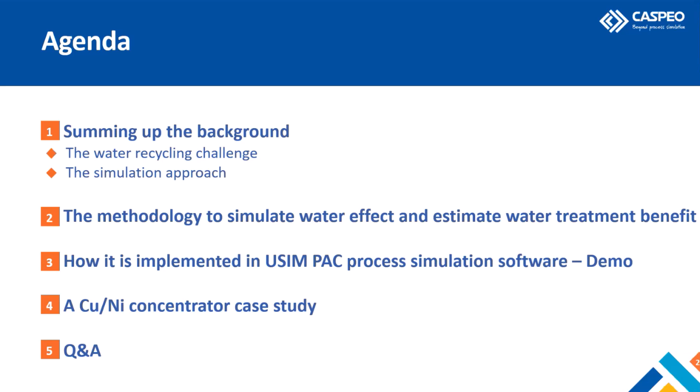Most of the work presented in this webinar was made in the European Union project ITERAMS. It had several targets: tailings valorization, minimization of environmental footprint, and more efficient water recycling in mineral processing plants. This is the task that Caspeo was involved in, more precisely in process simulation.

So to give a big picture about water management and the necessity of the company to have good water stewardship to maintain or earn a social license to operate, there is a need. What I want to illustrate here is there is a need to make water reporting.

This can be made at several levels. At the smaller level, at mine level, after the Brumadinho tailing dam failure, we had the global industry standard on tailings management that was released, and it embeds the requirement for water accounting on tailing dams.

At the company level, we have several frameworks, the water accounting framework and the water reporting, that give the framework for every site and the possibility for the company to gather all this data in the same report. In this way, the company can communicate on the way it manages water.

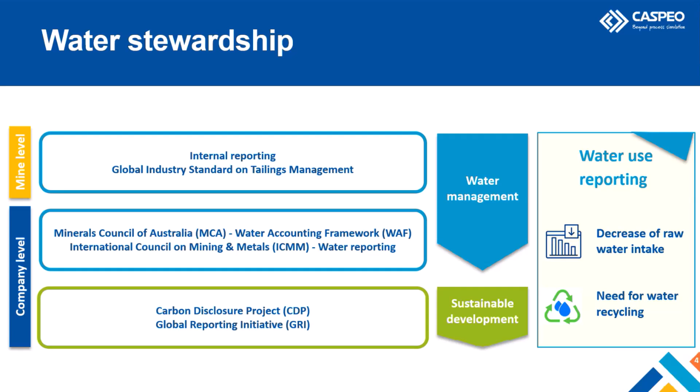There's a global need for water reporting, which leads to the need to decrease raw water intake and consequently to recycle more water in the plants. This increased need for water recycling also arises from a processing point of view, since water serves both as transportation media and reaction media. With the decrease of ore body head grades, we have a larger amount of ore to treat, and so more water needed to treat the minerals. There's a general trend to increase water recycling, which leads to more charged, recirculated process water. Two questions arise: what is the impact on process performance, and how do we manage this impact?

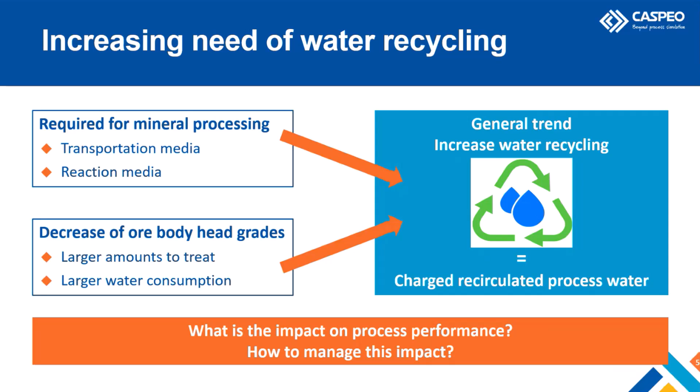Here is a simple flow sheet to illustrate the configurations we can encounter, and it illustrates our case study: grinding, copper and sequential nickel flotation, and tailing ponds at the end. The slurry goes to the tailing ponds, settles, and with this natural settlement we are able to recover some water and recirculate it through the different stages of the plant. But we still need an input of fresh water.

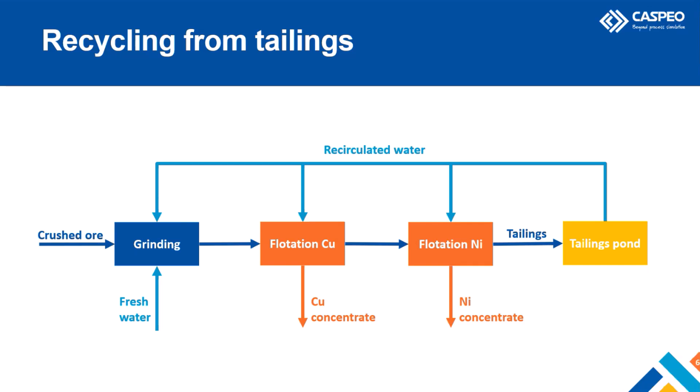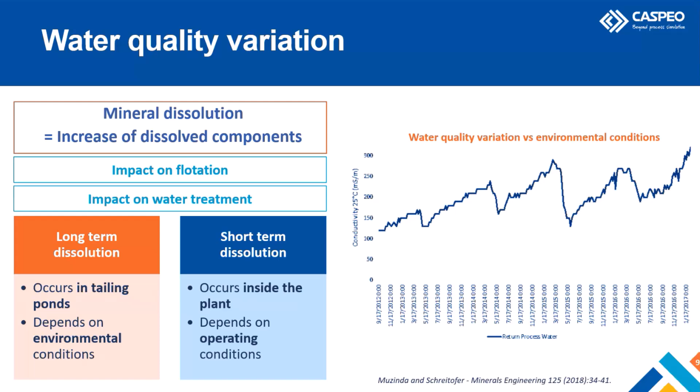We also see seasonal variations. During winter there's an ice cap, and snow accumulates in this cap. At spring, when it melts, this meltwater dilutes the process water, which accounts for the decrease in conductivity. So depending on the month of the year, we won't have the same water quality, and it will impact the performance of the plant. The other dissolution behavior is short-term, occurring inside the plant in the unit operations, and it's more dependent on operating conditions. This is the kind of dissolution we will tackle in this presentation.

To tackle this issue of simulating water impact on performance, we will illustrate this using the steady-state simulator USIM PAC, which embeds a library of state-of-the-art mineral processing models. What's important here is a specific approach of this software: it enables very configurable characterization of material, and it's very suitable when we use complex mixtures, as is the case here with slurries, which are difficult to describe as pure substances.

Another important feature of the software is a new feature we call configurable parameter law, which enables us to easily integrate empirical results from lab tests or pilot tests into the simulation. This semi-empirical approach is important for tackling the issue of water impact simulation. The advantages of simulation are that it avoids costly trials and enables us to easily assess new configurations of the plant.

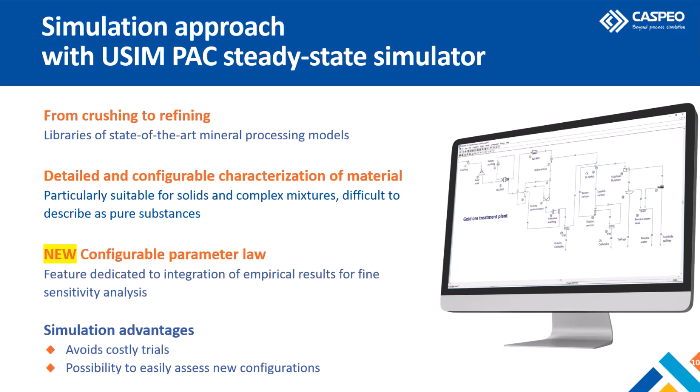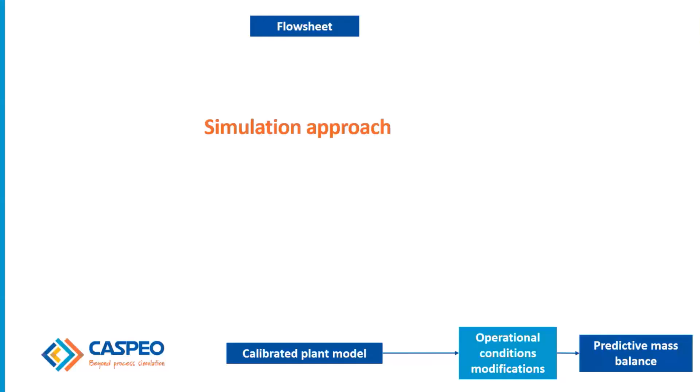So I will now describe the global approach. We begin with our configuration of the plant or flow sheet, and what we want is to have predictive mass balance, depending on the operational conditions. For that, we need a calibrated plant model. For this calibrated plant model, we need the plant data, the size of the equipment, a data set to calibrate the model, and the structured plant model.

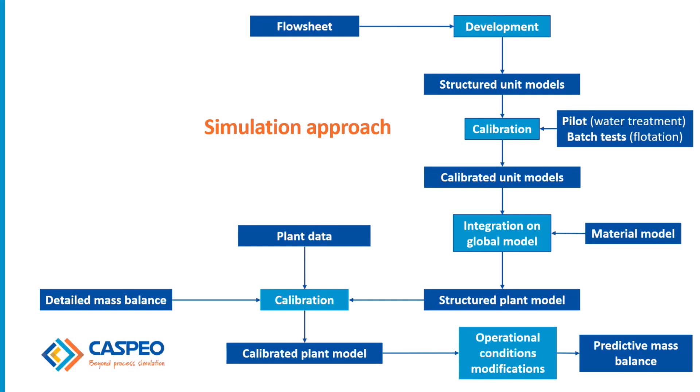To build this structured plant model, as discussed, we need a set of unit models that represent those used in the plant, which will be calibrated with pilot or lab tests, and integrated with the description of material in the structured plant model. We will also say a few words about obtaining the data set for calibration, which classically goes through sampling campaign, data reconciliation, and some assumptions on missing data. But now we will focus on building the structured plant model.

We will begin with the unit operation models. So unit operation models basically have several inputs: inputs regarding the material, so flow rates, composition, mineral or chemical, and also some parameters, for example flotation or dissolution kinetics, performance, and the size of the equipment. It gives as outputs the flow rates with mineral and chemical composition, but also other parameters such as energy consumption and capital costs.

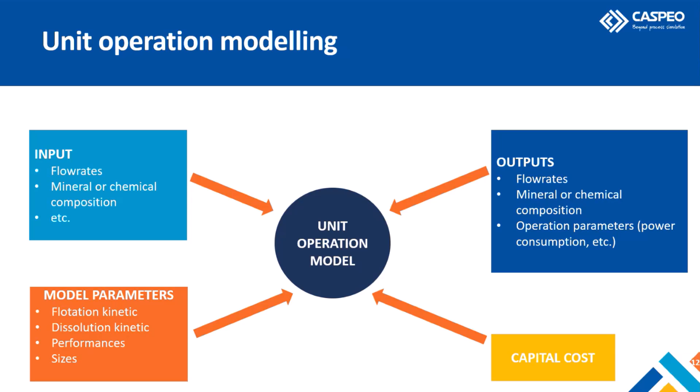In USIM PAC, we have several levels - a specific classification of unit operation models. We start with what we call level 0 models, which are pure performance models, just taking into account the results of lab tests, let's say a percentage of removal of a component, but no size parameter. Level 1 models integrate size parameters with simple parameters, but do not require complex experimentation, and we will focus on these two kinds of models. We also have a more complex model with higher accuracy, but which requires very specific tests.

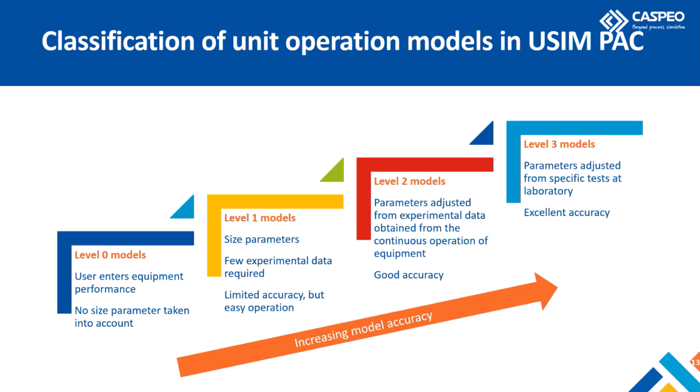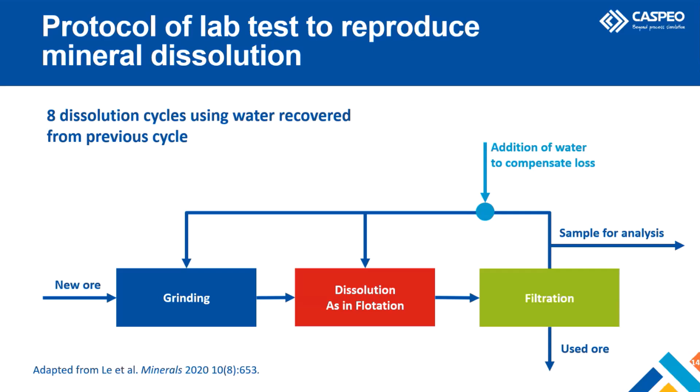I will now start with the first unit operation and the cause of the problem: the dissolution of mineral. Here in this simple flowsheet is represented an experiment made by our partner to simulate the behavior of mineral dissolution inside the plant. They took fresh ore, ground it, passed it through a flotation cell without reagent to simulate flotation but obtain the dissolution behavior, filtrated the slurry to recover some water for sampling, and to compensate this loss, took back some water from the start and recirculated this water through grinding and dissolution. This is a closed cycle, done in batch. After 8 dissolution cycles, they didn't see much difference in water composition.

To simulate this experiment, we used a first order kinetic model with 2 parameters: the kinetic constant and the maximal concentration that can be reached. Integrated in a continuous process, we use the corresponding equation but for a continuous process.

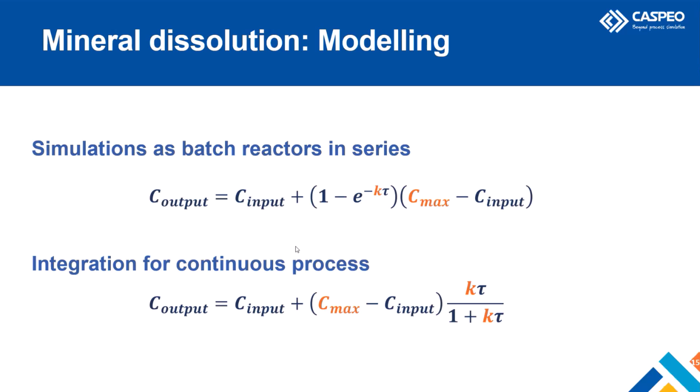In this graph are presented the results of the experiment and the model calibration. The results of the experiment are shown as dots for the first, third, sixth, and eighth cycle. We see that we reached a limit. But when we calibrated our model, we saw that in fact we could have gone further in concentration - we expected to reach a higher concentration. We explained that this is due to the way the experiment is done: we have to re-add some water at each end of the cycle to compensate the loss, so we have some dilution each time. In fact, this dilution is compensated by the dissolution of minerals that occurs during the batch cycle, but we can't go further - so this is a kind of pseudo-equilibrium.

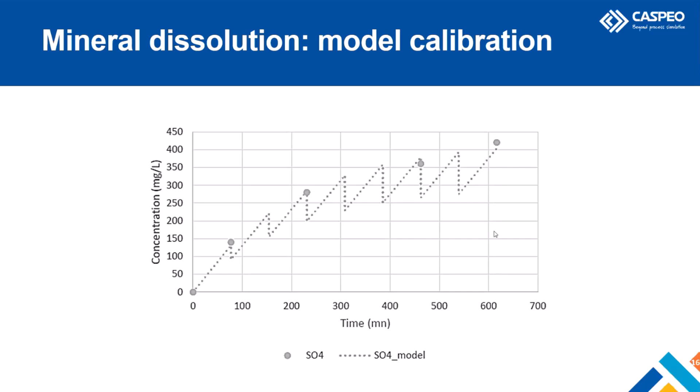So this dissolution model will be, as presented previously, associated to the unit operations where dissolution of mineral can occur. We have 3 flotation stages: rougher, scavenger, and cleaner. We didn't assume dissolution in the cleaner stage because there is a different operating condition there, with an increase of pH to depress nickel. So the conditions are not the same as in the flotation test of the plant, on which the mineral dissolution test was based. These are not the same conditions, so we assume dissolution did not occur in the cleaner. This assumption is reinforced by the fact that most of the slurry stream goes through the rougher and scavenger, and there's not so much slurry going through the cleaner.

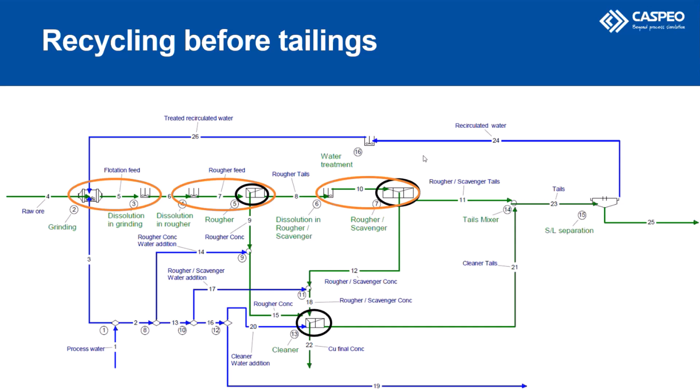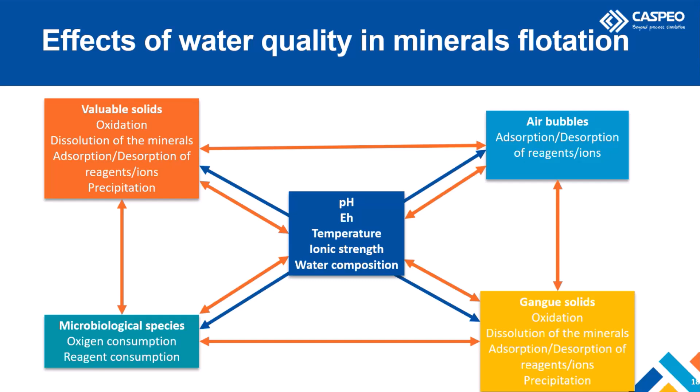We can have mechanisms linked to the solids, both valuable and gangue, such as oxidation, dissolution of mineral, adsorption of reagents, interactions with air bubbles, and with microbiological species also. This is very complex, so the approach we took was a semi-empirical approach, embedding these mechanisms in a simpler model. We use the first order kinetic model, as we will see.

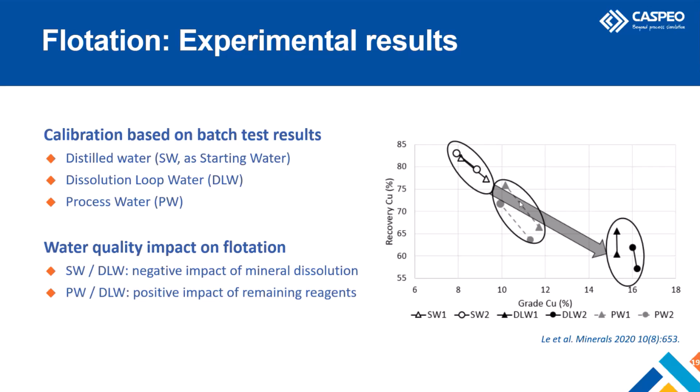Taking into account the concentration of the components that were assumed to have an impact, so sulfate, magnesium and calcium for negative impact, and collector for positive impact, we define the variation of kinetic constant depending on the concentrations of these components.

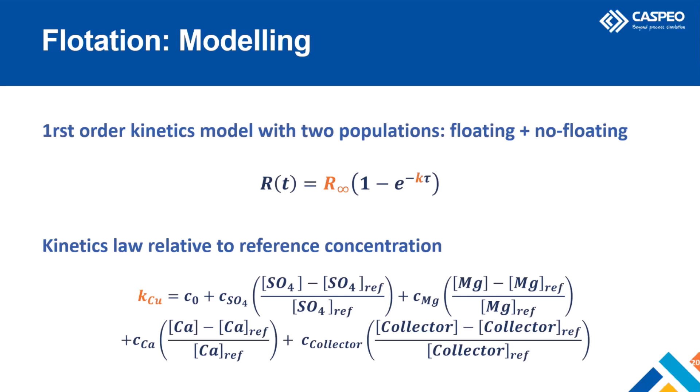So we've got our cause, the mineral dissolution, we've got the impact on flotation, and now we'll go through the last unit operation we need to mitigate the impact of mineral dissolution, so water treatment units.

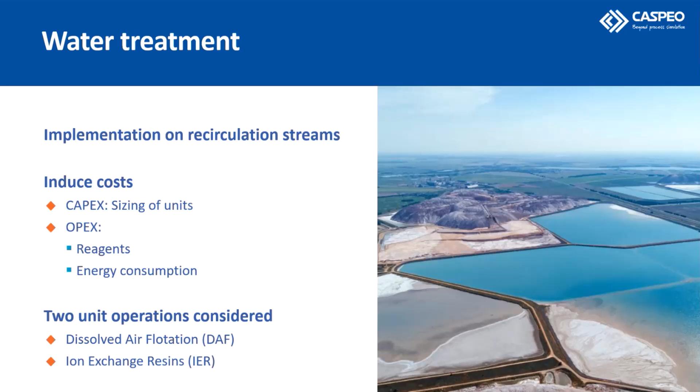They will be implemented on recirculation streams. They will induce cost, with capex and sizing of units, and also opex, with reagent and energy consumption. We will see two unit operations here: dissolved air flotation and ion exchange resins.

Dissolved air flotation mostly targets fines and dissolved components. It has a pretreatment with coagulation flocculation, and after this pretreatment, pressurized air is released to produce microbubbles that aggregate with flocs, make them float, and they can be removed. So the model is quite simple.

We use USIM PAC. We've got a fixed performance and key parameters, so air concentration and length-width ratio. With that, we are able to calculate outputs, the main characteristics of the process, energy, and reagent consumption.

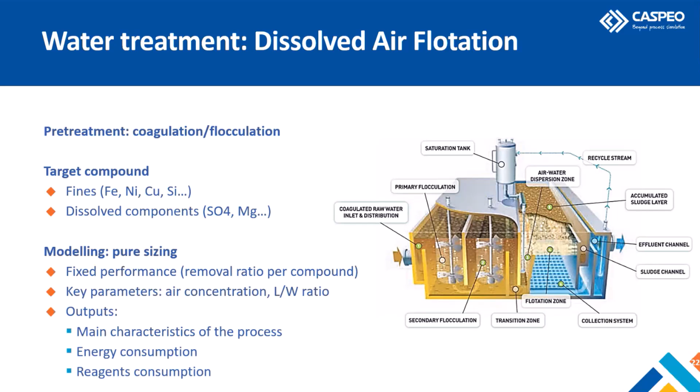The second unit operation is ion exchange resin. The targeted compound here is sulfates, removed by adsorption on resins, and this is a semi-continuous process with adsorption cycles and regeneration cycles.

Modeling this time is made with the Thomas model, with two parameters: adsorption kinetic constant and resin capacity. This calibration is obtained with the breakthrough curve.

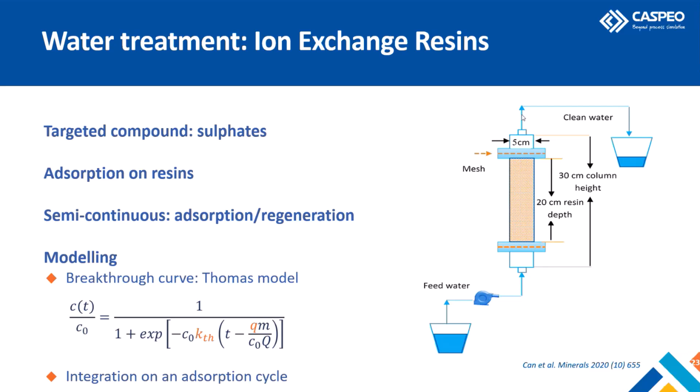So the experiment to have this breakthrough curve is simple. We take our water to treat, pass it through the column, and monitor the sulfate concentration at the output. And we obtain this kind of graph.

And after, in USIM PAC, we define a concentration limit at the output of the unit, which enables us to define the cycle time. By integrating over the cycle time, we are able to define the residual sulfate concentration that is split all over time, and the adsorbed concentration of sulfates.

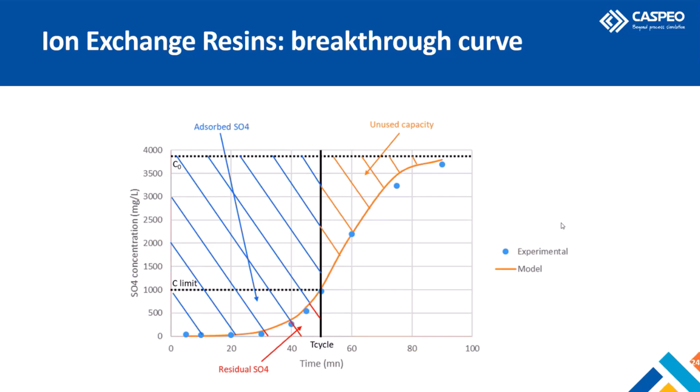So going back to our methodology, we've got all our calibrated unit models now. I'll just say a few words about how we obtained the data set for calibration of the structured plant model, about the sampling campaign and this whole obtaining of the data set.

This is a plant where there is very high water reuse, between 86 and 97%. We sample solids to get the performance of the plant, and it's important to have representative samples.

An important output of the project, ITERAMS, found by our partner, was that the protocols usually dedicated to environmental analysis were not suitable for process waters. So there was not much confidence in the water component analysis, and the water balance was only quantitative in our approach for calibration, and we considered the process water composition.

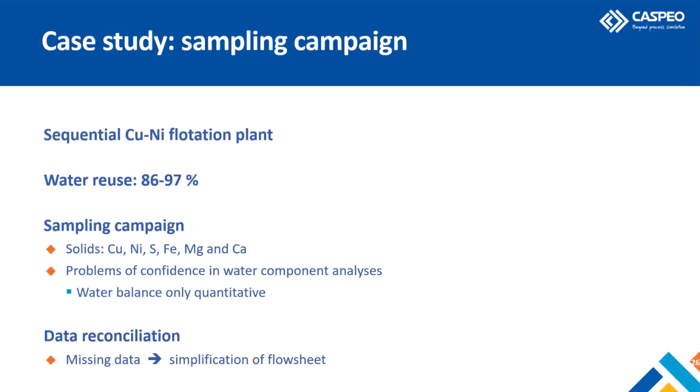We also had to make some assumptions, because we were never able to sample everywhere on the plant. For example, on the cleaner stages, the flow sheet I showed has one stage, but in fact we have several stages, and we were not able to sample between the stages. So we made the assumption that the kinetic was the same in every cell.

So having our detailed mass balance and calibrated unit models, we will gather all this, and we will now see the demo with calibrated unit models, integration and definition of a material model to have structured plant models, and go to the calibrated plant model. That is our final target. So I will now launch the demo. That is the video.

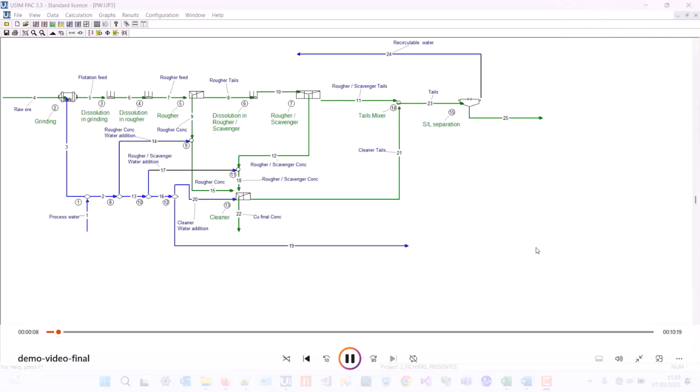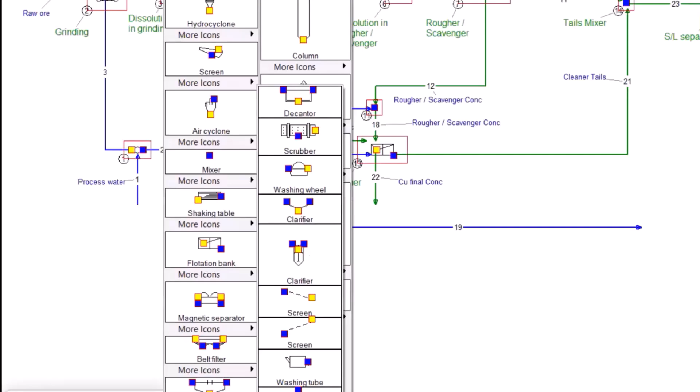We will now see how to integrate all the presented elements in USIM PAC, a commercial steady-state simulator software. The first step is to draw the flow sheet, which is the structure of our simulator. This is done with a dedicated interface. Several libraries of icons that are associated to the models of software enable to draw the network of nodes and streams that represent the flow sheet of the plant in a meaningful way.

The second main step is the description of the material that will be handled in the simulator, which is done with a feature called phase model.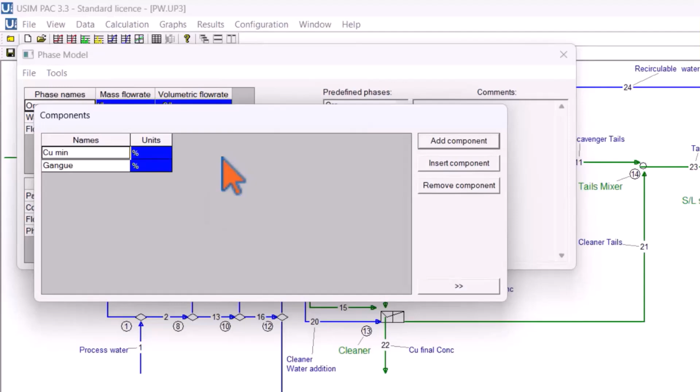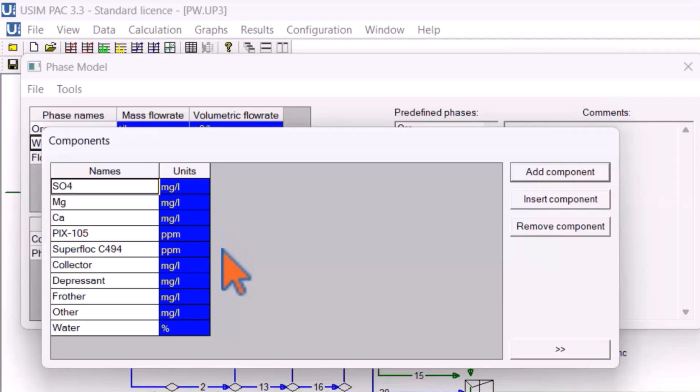First solid phase represents the ore. It is composed of copper-bearing mineral and gangue, which have different floating ability. We have here two proportions to handle floating and no floating. Liquid contains the various ions that were considered as impacting flotation: sulfate, calcium, and magnesium, as well as the reagents for flotation - collector, depressant, and frother - and for water treatment, coagulant and flocculant. The last solid phase is added to manage the flocs that can be produced during water treatment.

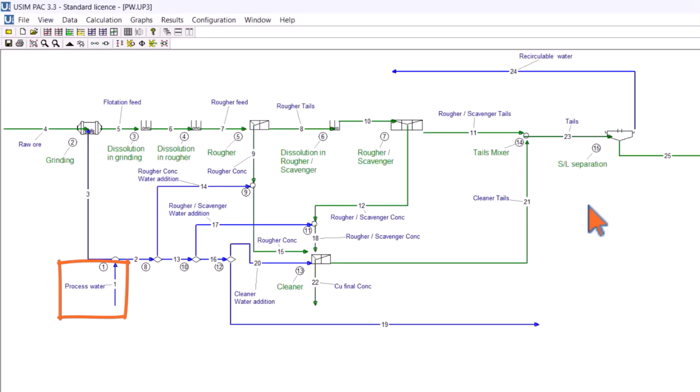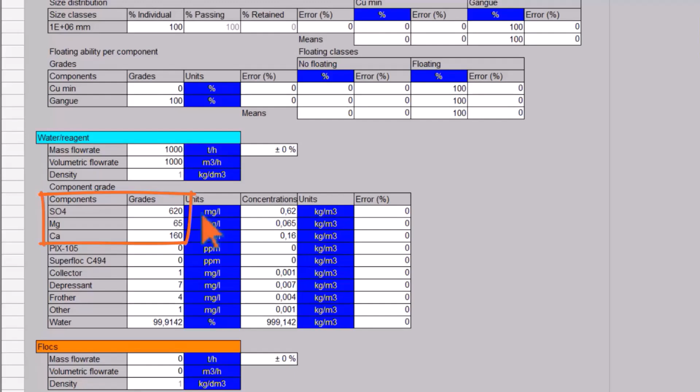In this case, we consider a fictive copper flotation plant with a simple structure: rougher, scavenger, and cleaner stages. Process water comes from the tailings and is distributed all over the plant, with a reference composition of 620 mg per liter sulfate, 65 mg per liter magnesium, and 160 mg per liter calcium.

To account for mineral dissolution, a fictive reactor is associated to the unit operations where dissolution can occur: grinding and flotation. The parameters that were determined from dissolution loop lab tests, maximum concentration and kinetic constant, are input of the dissolution model.

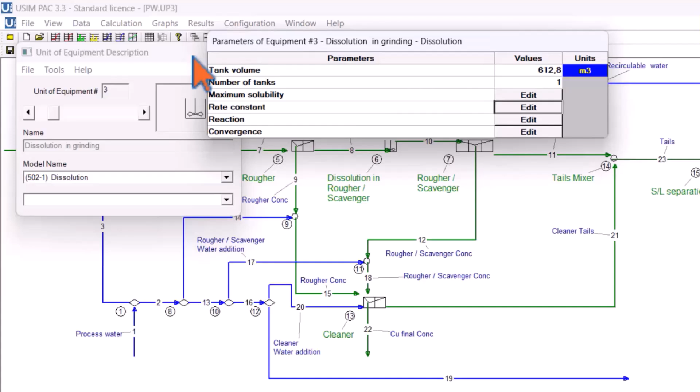The flotation properties of the minerals are set in the input stream of the plant. We can set here the ultimate recovery that has been estimated from batch flotation tests.

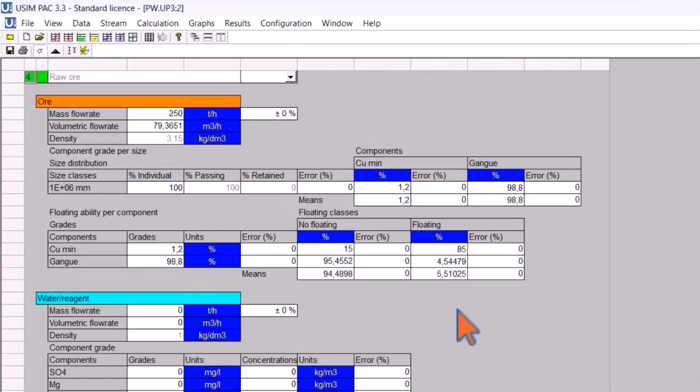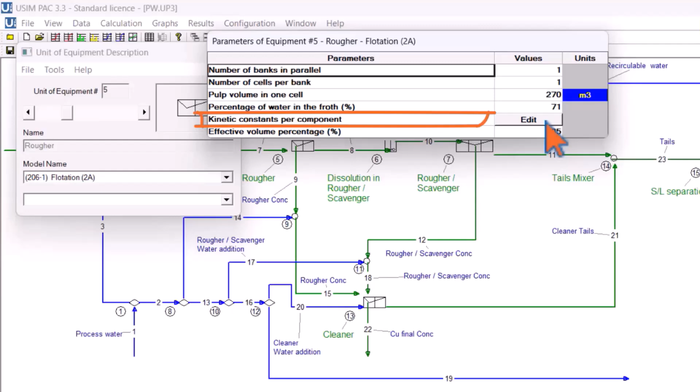For each flotation stage and each mineral, we integrate the law of flotation variation depending on water compositions that were determined from batch flotation test series, with a specific feature: the configurable parameter model. The coefficients that were estimated are set in the specific interface, which enables to make the link with the other parameters of the simulator. For example, here is the coefficient corresponding to the sulfate concentration of the input stream of the rougher stage.

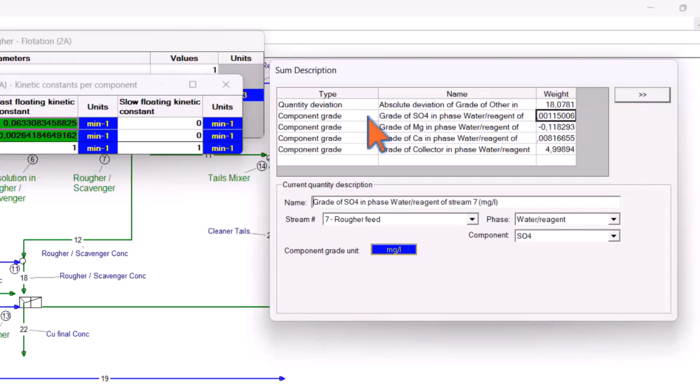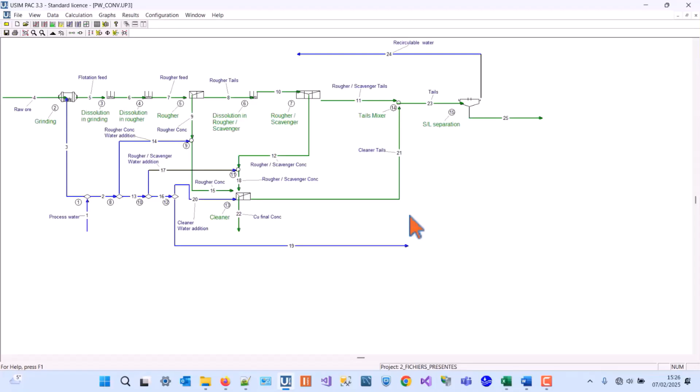Let's now run our simulator. Once the simulation is over, we can save our file. Now we have a reference mass balance that enables to calculate performance such as recovery in this configuration.

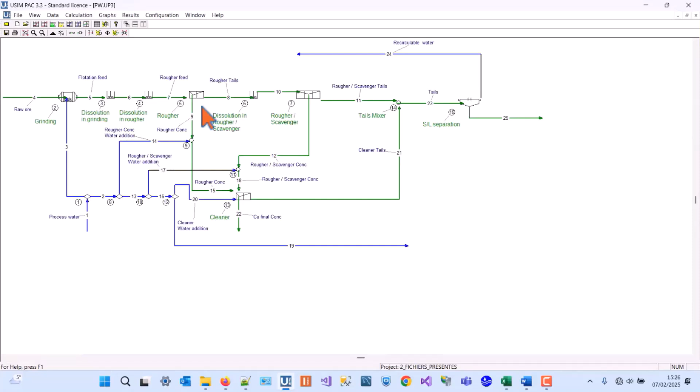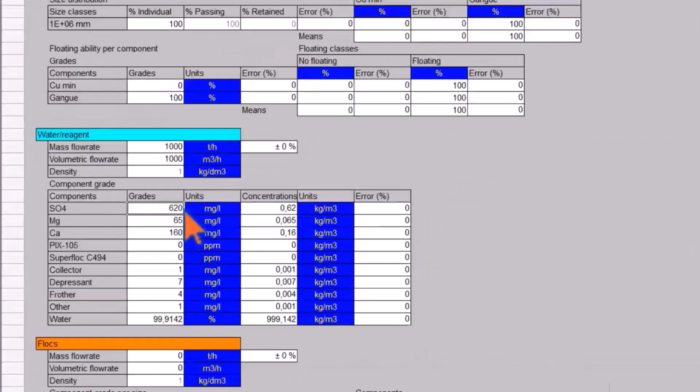Let's now assume that there is a buildup of dissolved components in the process water. As we saw previously, this can happen with seasonal variations and changes of environmental conditions. Let's save. We'll start from our reference simulator, save it as another file, and change the composition of the input process water. Let's consider a buildup of around 10% for each impacting component.

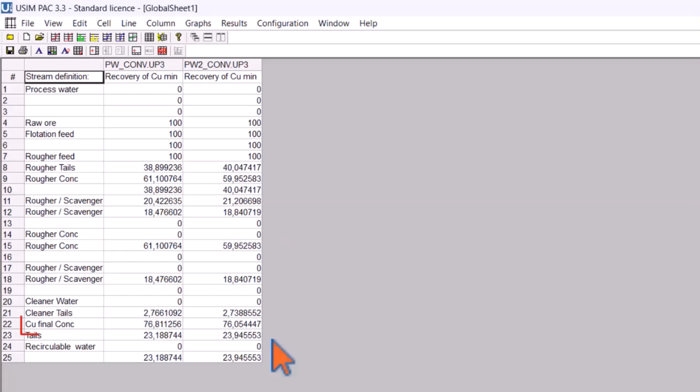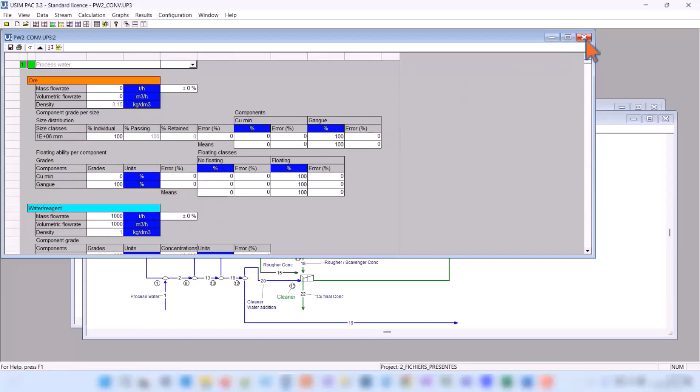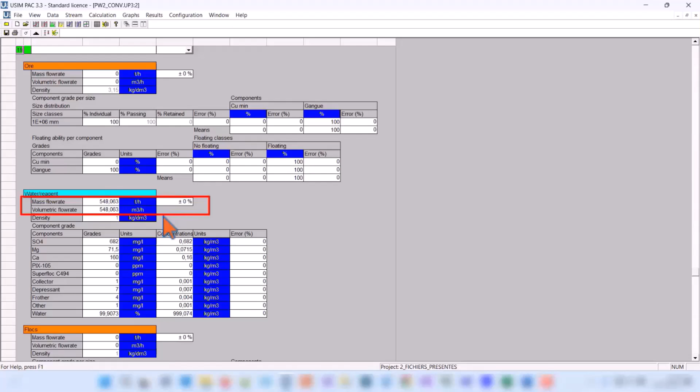To remedy this situation, other treatment operation can be implemented. Let's check flow data to have an idea of the process water flow rate to be treated. We've got 1000 cubic meter per hour in input, and around 550 remaining at the output, so around 450 cubic meter per hour to treat. We've got to treat sulfate, magnesium, and calcium.

Unit operations that are considered to do so are dissolved flotation and ion exchange resins. Some calculations should be done before initializing this part of the simulator. Dissolved flotation is the only operation to treat magnesium, and sizing will be based on its performance on this component. It also serves as pretreatment for ion exchange resins, which is needed as a polishing step for sulfate and calcium.

As dissolved flotation removes an important ratio of magnesium, if it were used to treat the whole stream, the output magnesium concentration would be lower than the target one. Consequently, only one fraction of the input stream should be treated. Based on this, the target concentration at the output of ion exchange resins operations can be calculated.

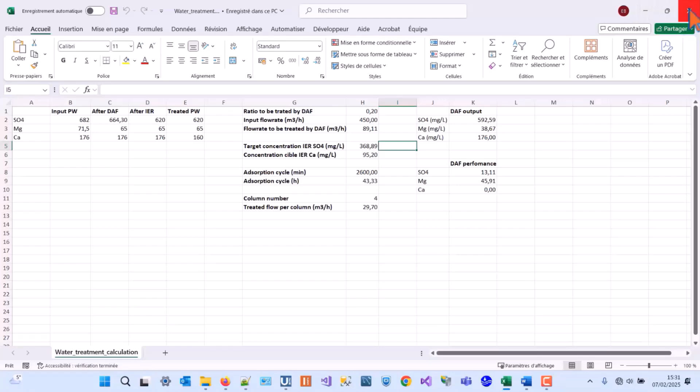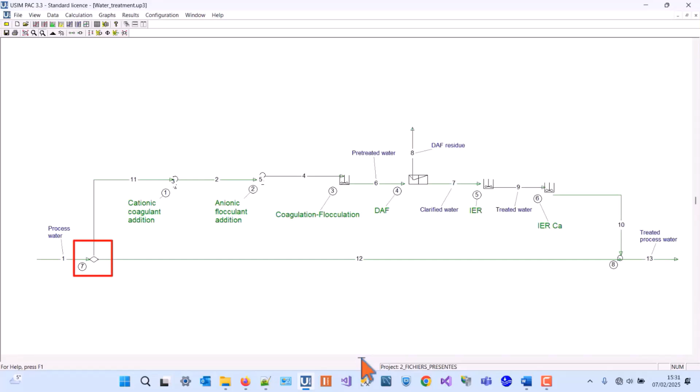Here is a subflow sheet corresponding to the established pre-calculation for water treatment. We first have a splitter to manage the bypass of the water treatment operation. We find back here the values that we calculated in our Excel file.

Dissolved air flotation comes with a coagulation flocculation pretreatment. The operation model is a performance model, directly considering component removal obtained in pilot tests.

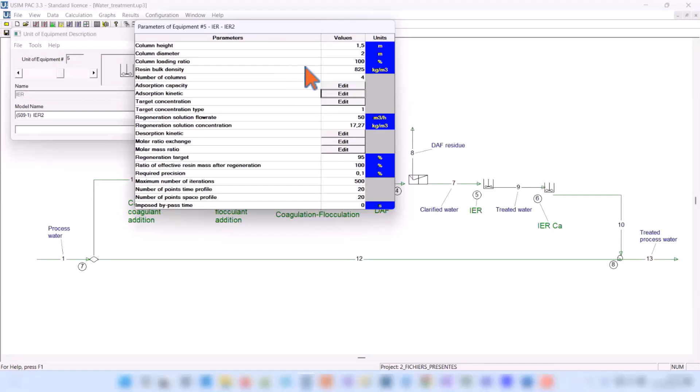Ion exchange resins calibration is based on breakthrough curve tests, with obtaining resin capacity and adsorption kinetics. The number and size of the columns are set as input of the model. A final node manages the mixing of bypassed water and treated water.

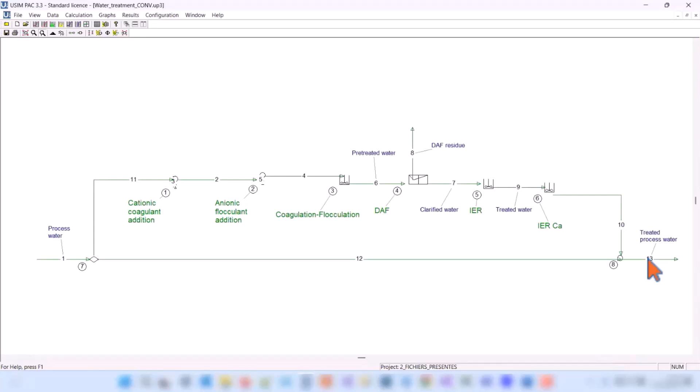Let's run the calculation. We can check that our target water composition is reached. We can also check the adsorption cycle time, and check whether it is long enough or not.

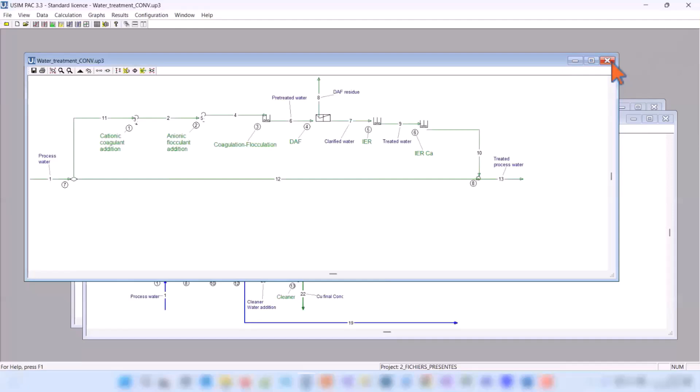With this sizing step of water treatment, we are now able to compare the loss of performance and the requirement for water treatment.

So we saw in the demo finally how to obtain the calibrated plant model, and we'll go on to the final step of the webinar with assessing different scenarios by modification of the operational conditions to obtain different mass balances, and so assess different scenarios. So the first one regards the long loop that was presented at the beginning of the webinar.

With water recirculated from tailings, in our simulation we didn't simulate what occurred in tailings, just considered process water composition steady, and tried to see how it impacted the flotation.

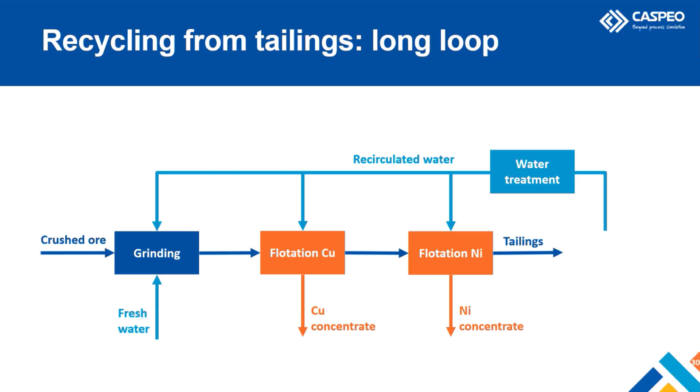And we implemented water treatment on this loop to make the comparison of performance. The calibration was based on lab and pilot results based with real waters and water treatment tests associated to batch flotation tests. So what these tests showed, the results were that we had higher kinetics both for copper and nickel, and so higher recoveries.

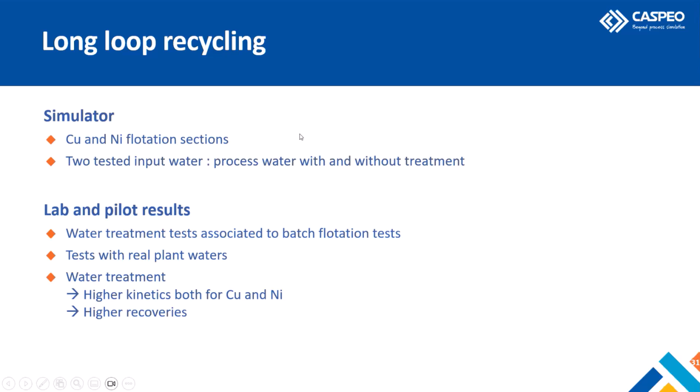So we integrated these results on the calibrated plant, and we saw that with this more important kinetics of nickel reported to the copper concentrate, this was a loss of selectivity and of performance.

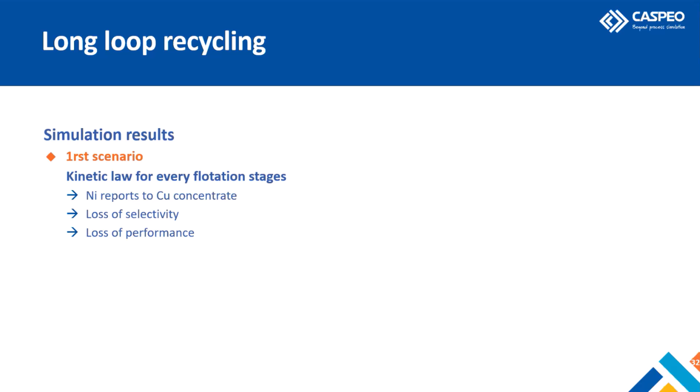But this was not embedded in the protocol of batch flotation tests.

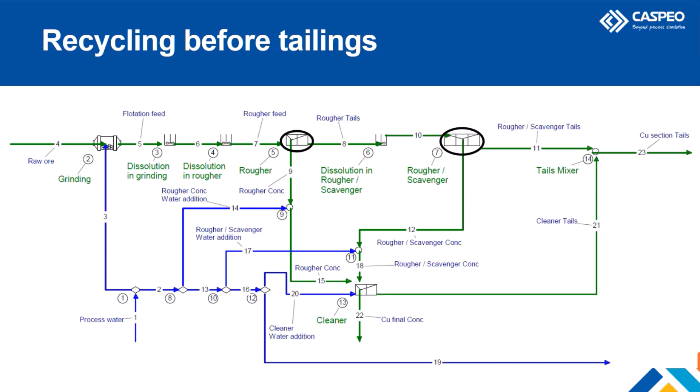So we tried another scenario and considered that there was no kinetic variation in the cleaner. We considered that the operating conditions prevail over water variation, and consequently that in this scenario, it's a limiting case where nickel depression prevails in cleaner stages.

So here we don't have kinetic variation, selectivity is kept, and in this case we saw an increase of performance. So we see that it's important to integrate the batch tests on a global approach, on a global plant, to have an idea of what will occur.

And here, so more advanced work would be required. Another important thing that was

highlighted in this study is that we have different unit operations for water treatment, but they don't target the same compound, and they don't have the same results. So for dissolved air flotation, we studied fines and other components.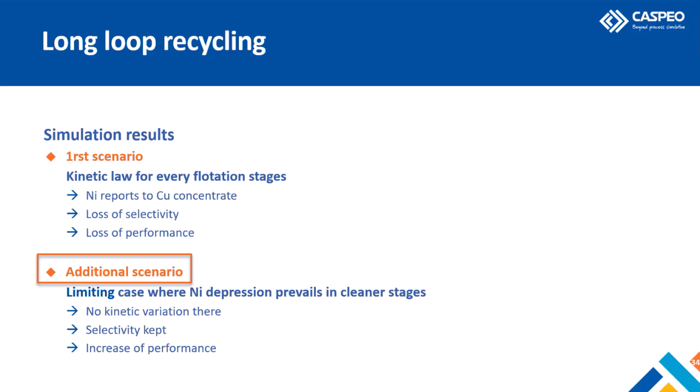For ion exchange, no fines. So usually, dissolved air flotation is used before ion exchange. But what is important is to have homogeneity in the protocols for every unit operation.

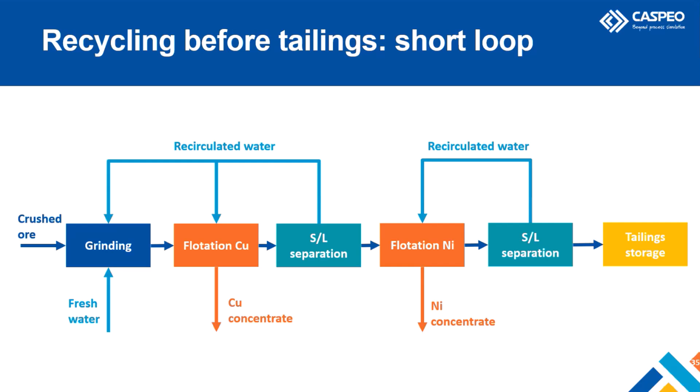So the second case study regards the recirculation before tailings with short loop configuration, and we will focus on the copper section.

So we have our solid-liquid separation at the end of the copper section with recirculated water dissolution, and we will try to see what occurs when we have more or less intensive solid liquid separation.

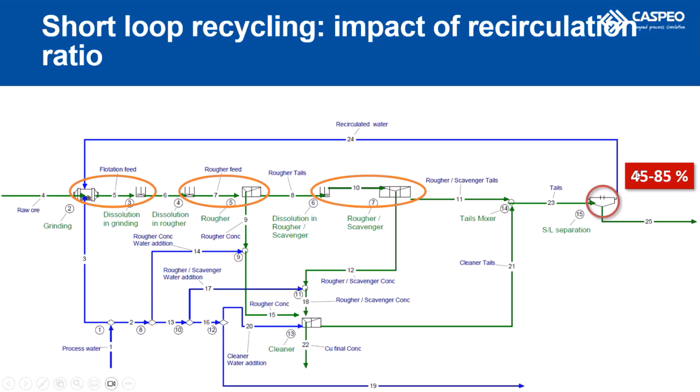So this is the percent of solids in the underflow, the solid concentrate of this operation. And we will see how the concentration of sulfates varies on the recirculation. So we initialized with reference process water with sulfate concentration of 620 milligrams per liter.

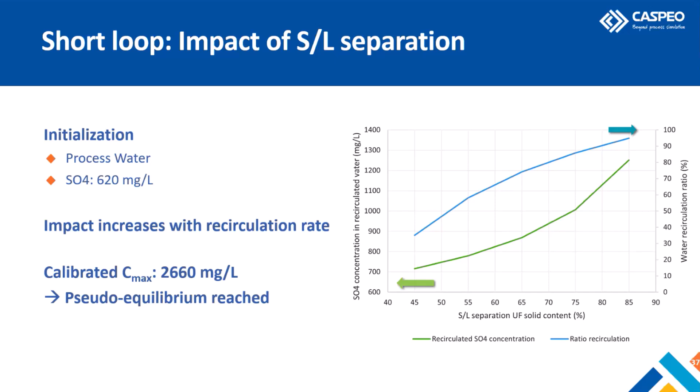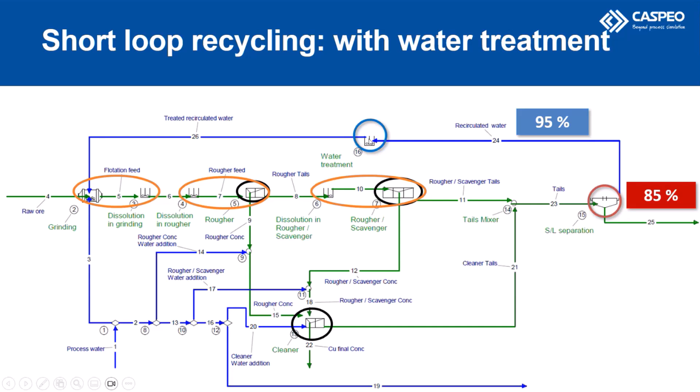And now, to go further, we took the limiting case where we recirculate the most water with 95%. And so still we have a dissolution and flotation that is impacted, and we implemented different water treatments. So we took three scenarios.

We wanted to have at the output of our water treatment a composition of processed water: weak treatment with 25% more concentrated water, and strong treatment with 25% less concentrated water.

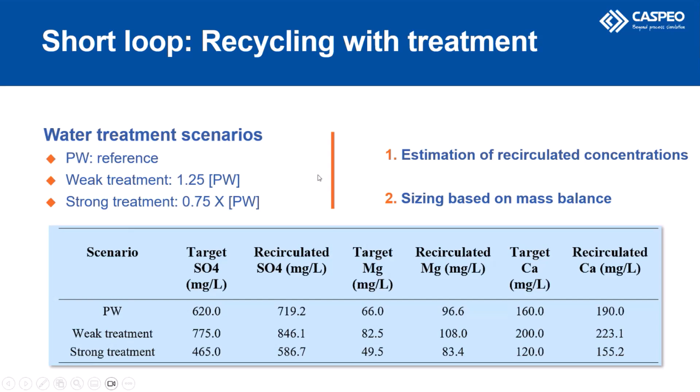So first we set a performance model to have an estimation of recirculated concentration. We set the output of the water treatment and see what is recirculated. That provides the mass balance, and we were able to size the water unit treatment. Here are the final results.

Regarding the performance of the plant, weak treatment led to a decrease of recovery of 4.5%, and strong treatment to an increase of recovery of 2.3%.

These figures should be put in front of the requirement for water treatment intensity. We see that for strong treatment, we need higher capacity for dissolved flotation, a higher number of ion exchange resin columns, and shorter adsorption cycle duration, so a more intensive process.

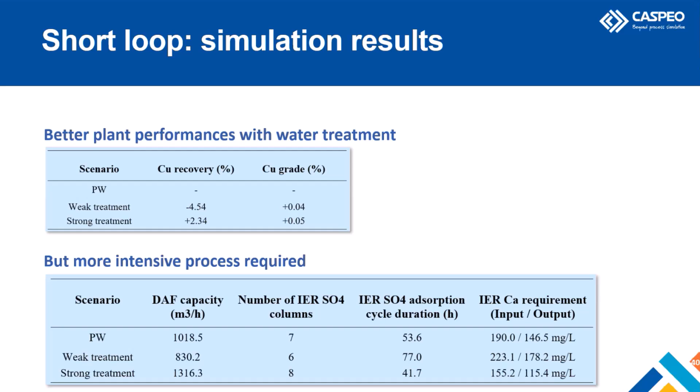So to make a summary on the case studies, there are three points that I would like to recall.

The first one regards process water characterization. As mentioned, the current methodology is more devoted to evaluation for environmental purposes, and it was not really suitable for the characterization of more unstable waters, the process waters, and there's a real need for development of dedicated protocols.

We saw the importance of the global approach simulation, with trends that are not clear-cut from lab pilot studies, and the importance of this global approach for the potential impact of one operation on downstream ones. For example, if some reagent from solid-liquid separation, some flocculant, is recirculated to the flotation, this can have an impact on flotation, and it's important to have this holistic approach.

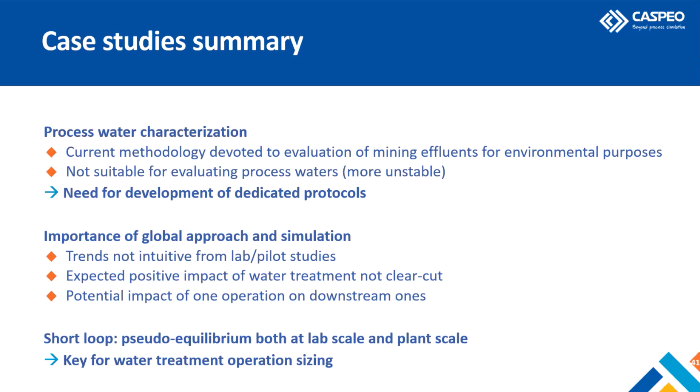The last point is on circuit configuration. We show that we have a pseudo-equilibrium both at lab and plant scale, and this equilibrium is key for the water treatment operation sizing.

Summarizing now on the methodology key points, what I would like to retain is the importance of good basis data obtention. This requires a robust sampling protocol to have representative sample collection, good estimation of humidity, and good characterization of solids. As mentioned from the output of the case study, we also need a good water analysis protocol for water characterization. So this regards the obtention of the data.

Regarding the structure, we need several model types: solid-liquid separation for solid and liquid circulation, mineral dissolution which accounts for water composition variations, flotation which gives mineral recovery, and water treatment operations that make corrections to water composition variations. It's by gathering all these bricks that we obtain the simulator.

Finally, what I call exhaustivity of monitoring is what I mentioned: the protocol should be homogeneous between the different unit operations studied, even if a point is not initially the focus of that unit operation. This protocol should be the same across every considered unit operation. All of this enabled us to build the methodology that we saw, which was the final result of this project regarding water management.

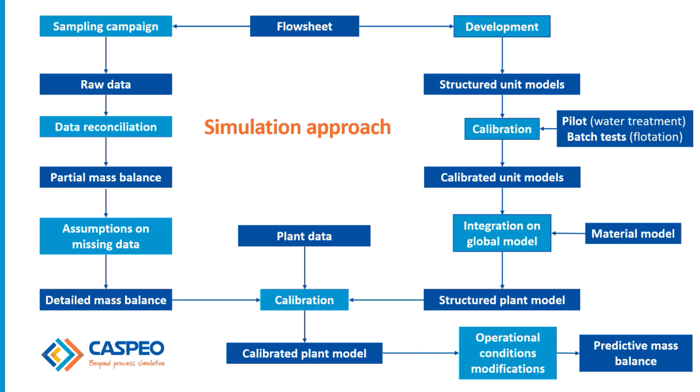So to conclude, given the complexity of the mechanisms involved in flotation, we consider the semi-empirical approach, and this combination of experimentation and simulation capabilities enabled us to build a plant simulator that provides mass balances, equipment sizing, and energy consumption, which in turn enables economic and environmental assessment of different scenarios.

Finally, we see that simulation, through a better understanding of plant behavior, enables efficient water use, which in turn enables the company to demonstrate good compliance with water stewardship.